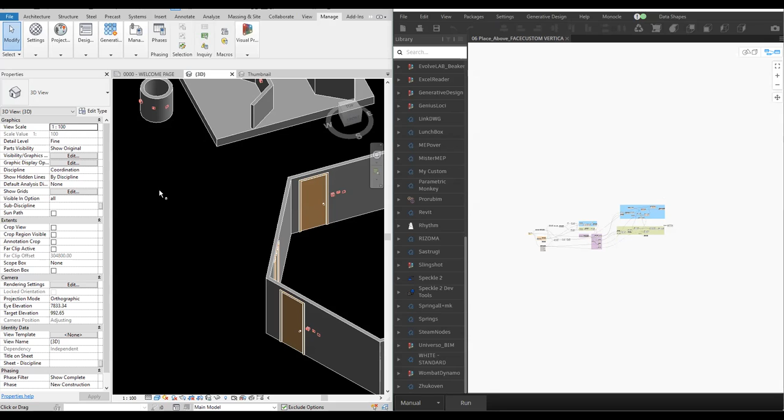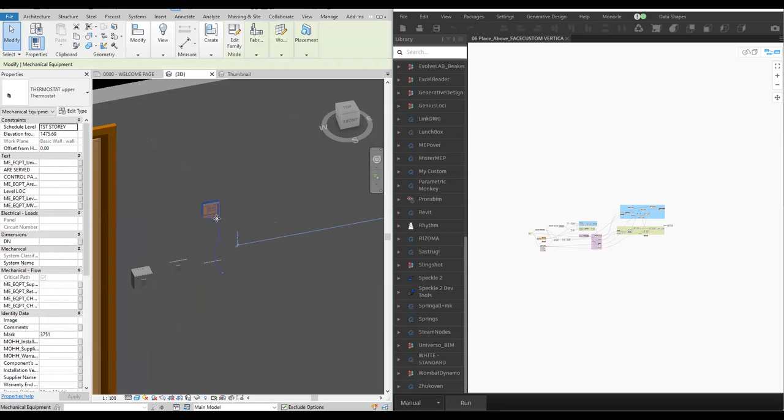Here's another automation: how to place a face-based family into the walls. So you select the electrical elements, already finished placing all their lighting switches here. For example, there are multiple switches in this sample. After placing the electrical switch, we require placing a thermostat above it.

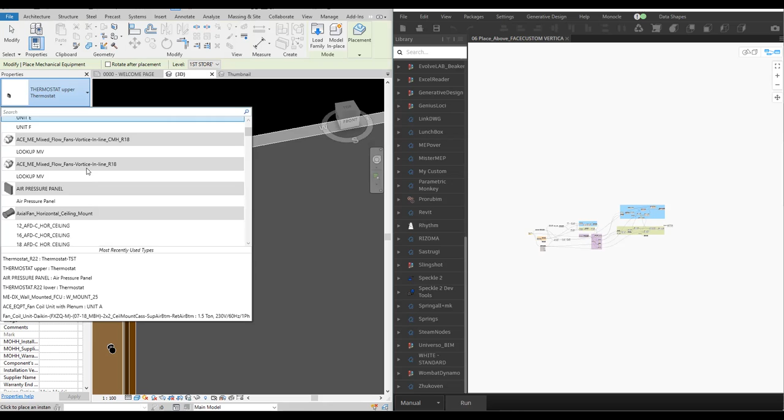So I type ME again and check the air pressure panel. This is the work that you need to place. For a specific room, you place a thermostat, then an air pressure panel above. Take note that this is a face-based family.

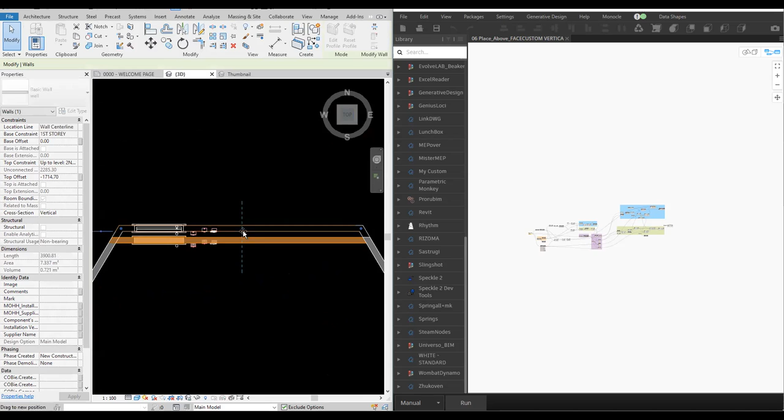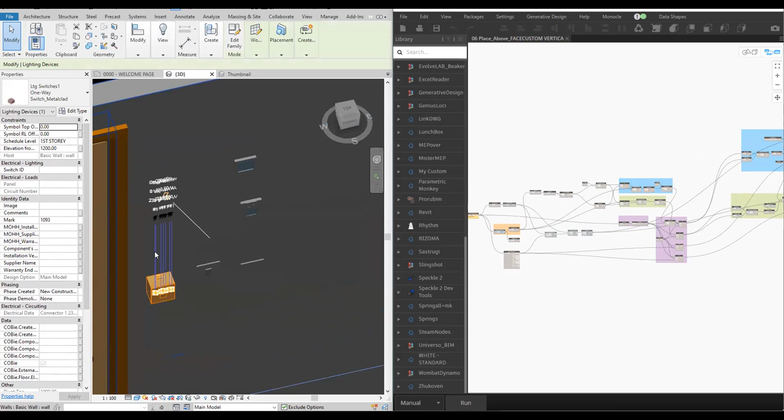If this is an architectural link and it's moved, all the family moves with it. So we'll cover how to work with Dynamo and how to edit custom families to work in your favor with the script. This is an automation: you select only the electrical switch or lighting switch, then automatically it places a thermostat, and the next step is the air pressure panel.

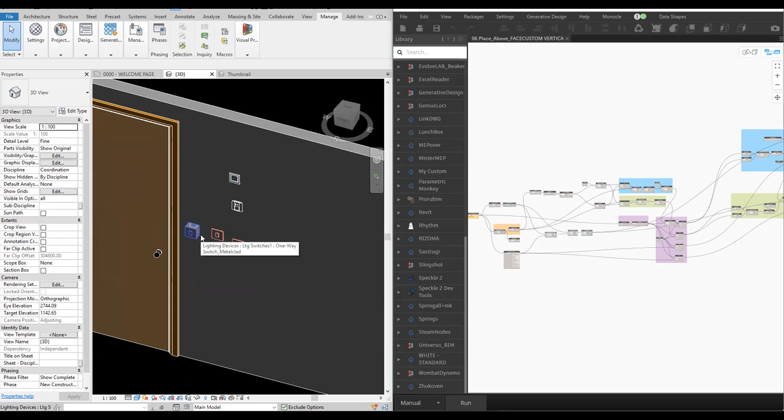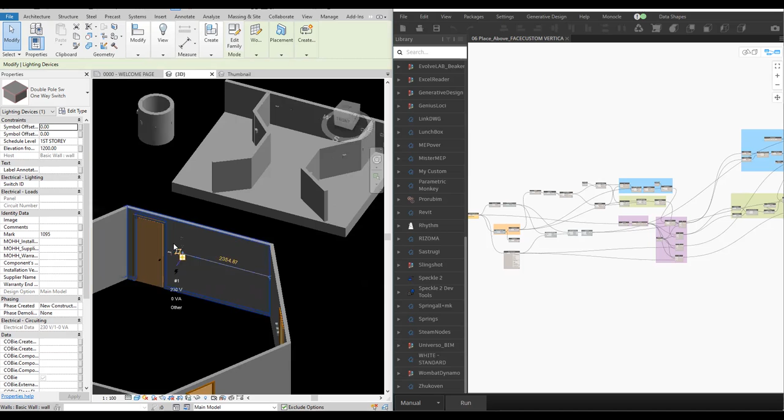So let's go. This is your project with all your walls and doors. Electrical is ready placed, informing the mechanical team they've already placed all the thermostats. If electrical is finished, it's way easier for us to place automation. We just select the lighting devices, then automatically place a thermostat and then an air pressure panel, or we can place this face-based family electrical. Let's try to place it here first before we go there.

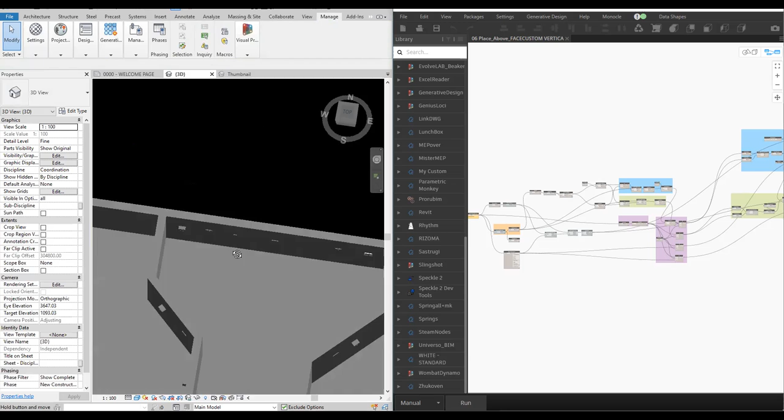This is a thermostat also, which we want to place above. Any face-based family can be placed. So let's start with this typical X and Y coordinate walls, with no sloping, no reversing of the start and end point of the wall.

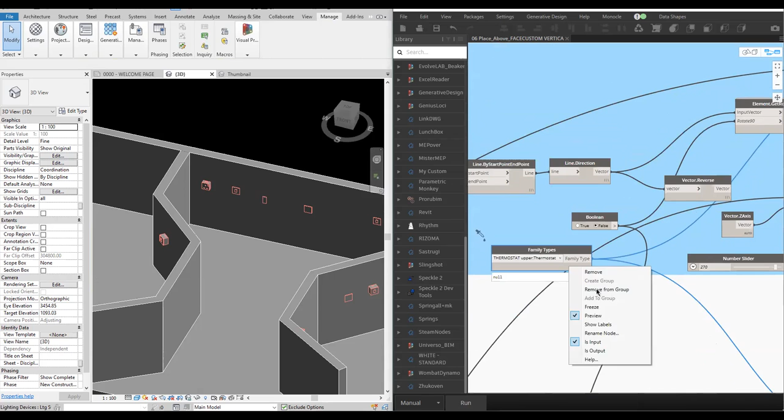Okay, start here, maybe I'll do it as automation, face-based vertical. I'll just face this one and then face this one. Then where's the family types? This one. Remove from group. Let's just try the thermostat above, I'll go one by one here.

Now we create a script. This one's smaller. So we select first the elements. There are two processes here in the script. Once you select, for example, one element, then run automatic. Once you select one element only, we have an if-statement formula here.

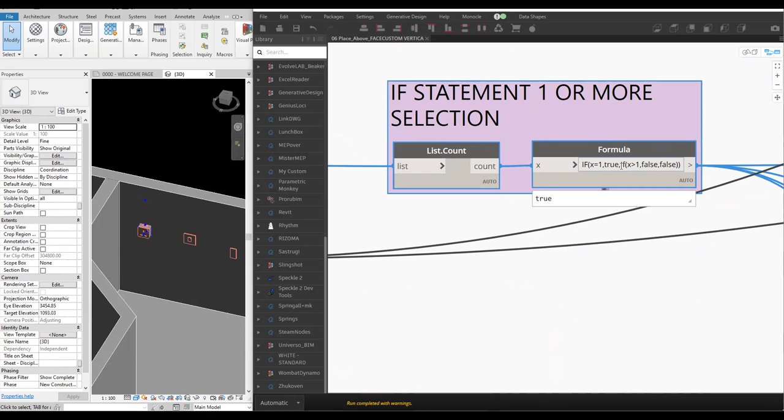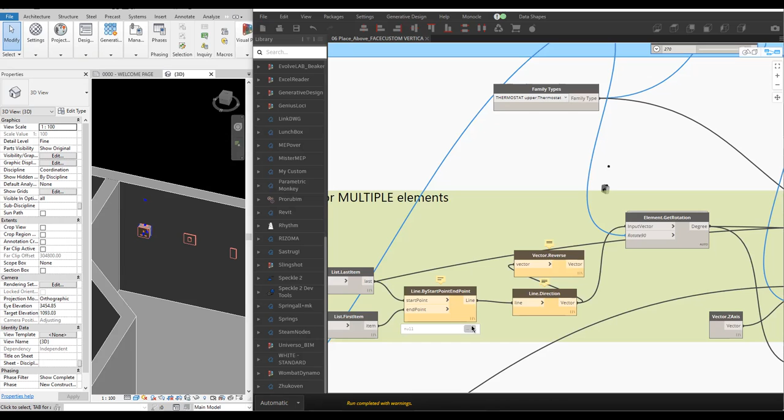If the list count selection is one, then true. If x is greater than 1, false, it will go here. So this is the selection filter for one or more than one. As you can see, this is for a single element, and this is for multiple elements. Currently this is zero, no value, none, because we set the if-statement formula here. So this is a single element only, this is the script.

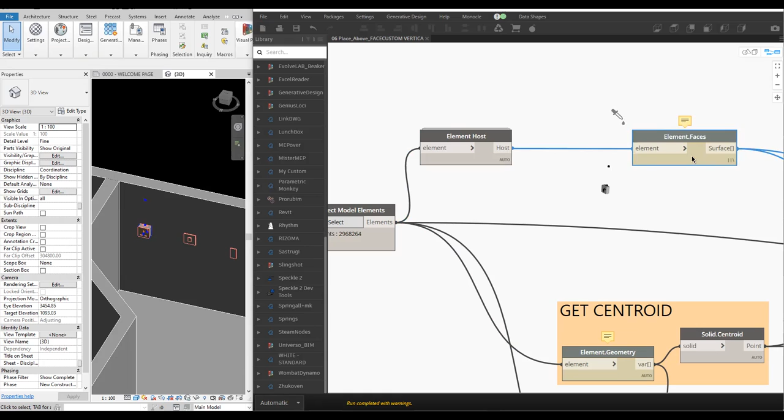So what happens here is we go back to the beginning. You select the element, then get the element host, which is the wall. You'll need this because we're going to use a face-based family instance. Then you get the element faces, the surface - let's screen capture this one. Next, we get the centroid of the geometry of this element, the element geometry centroid also.

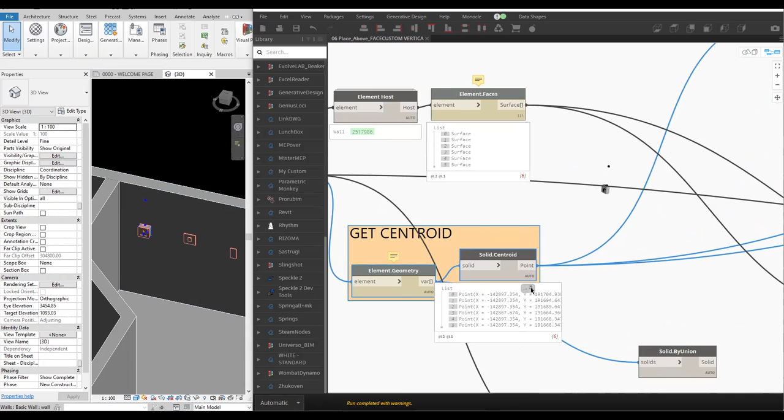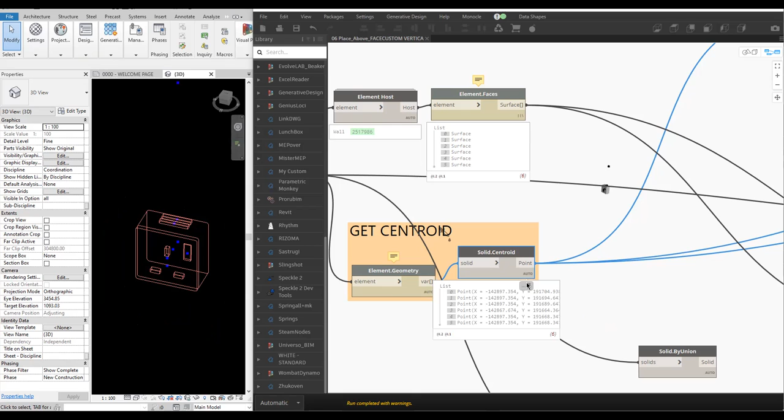Meaning that, for example, in this family, if I go to the frame, all this extrusion is a solid - solid, solid, solid, solid also, see, then this is solid. So we're getting all the extrusion in that family, all the solids, and this is all the centroid.

After that, we filter this customized family. I placed specifically these two extrusions above, so I can get the 2 points because it will control the rotation of our face-based family. I get a line there, and then I get the vector also, placing a line between those 2 points. So how do you get that? How to place a temporary or reference point?

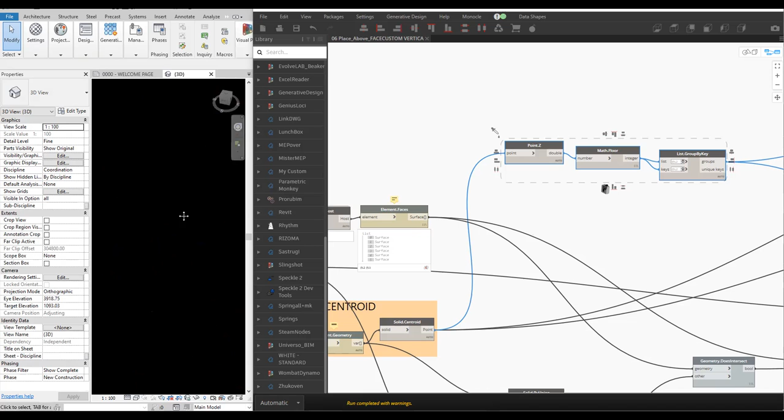Select this one. After getting the centroid, you go to the Point.Z, this one. Then after that, you have a Math.Floor, so you select all those Z values with the highest value, sorted.

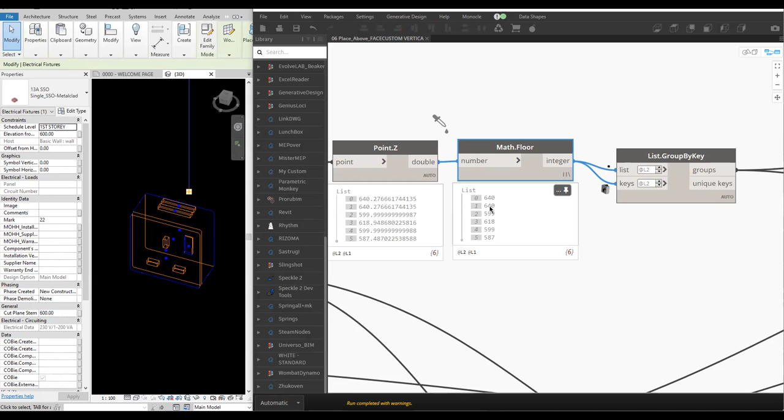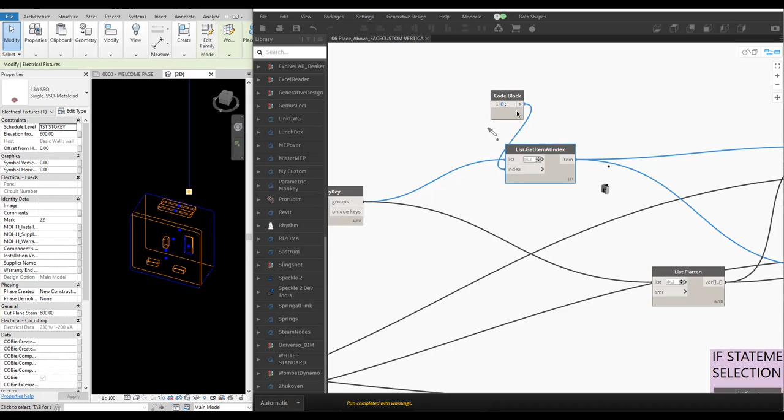Ascending order. So 640 is the highest, 587 is the lowest. So after that, you use List.GroupByKey. Okay, you have the group here. So you're extracting the groupings of the highest value. And after that, now you extract the group list in group 0, this one, 640. So this one will come up here, 640, 640. Okay.

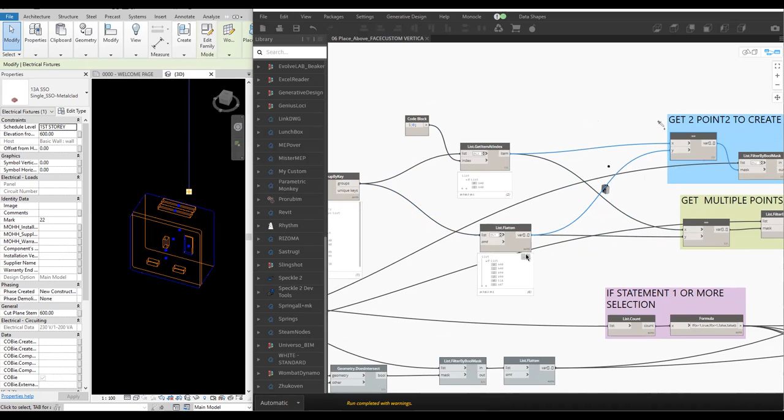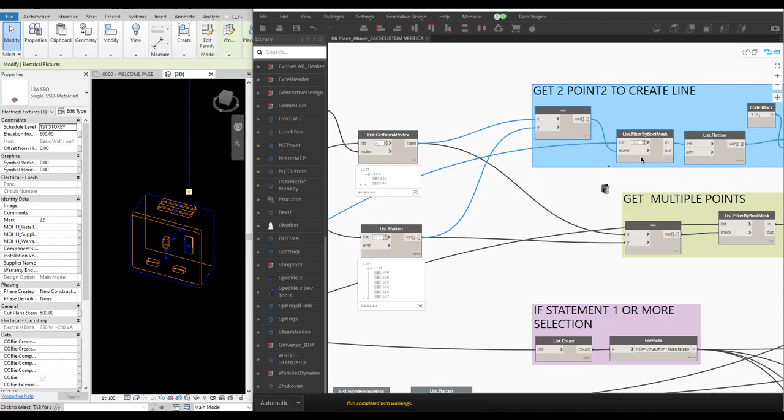Then after that, you flatten this group, and this is the numbering. You can get it here, or you can get it directly here. It doesn't matter. Then after that, you have to use Equal. So 640 is equal to this 640. You have to equal them. If it's true, then it will be filtered here. So get 2 points to create a line. So this line came from this centroid. So we're getting these 2 points here. Okay.

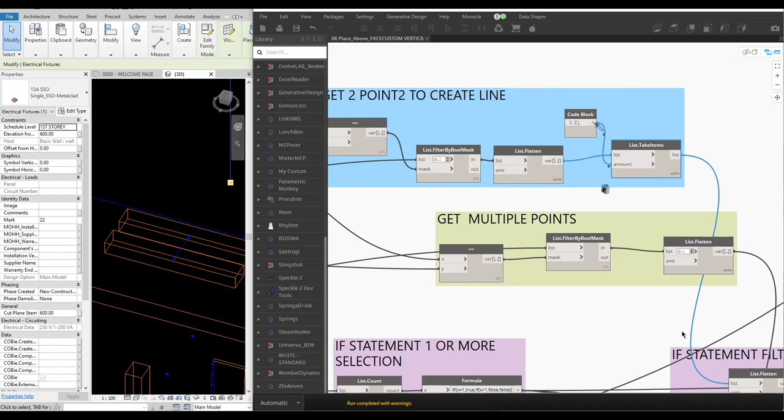After that, you get the 2 centroids, then you use List.TakeItems, 2 items. Or you can go directly from this one to here, flatten. Okay. So this is our single selection. Then it will go here. So this is the first item and the last item. So either this one or this one. Then you have to create a line.

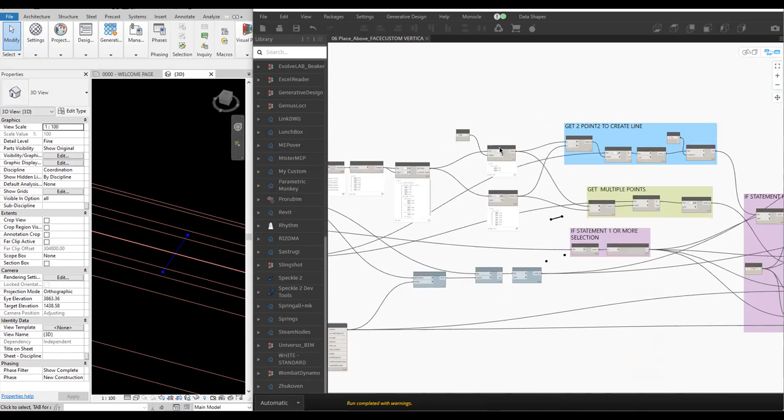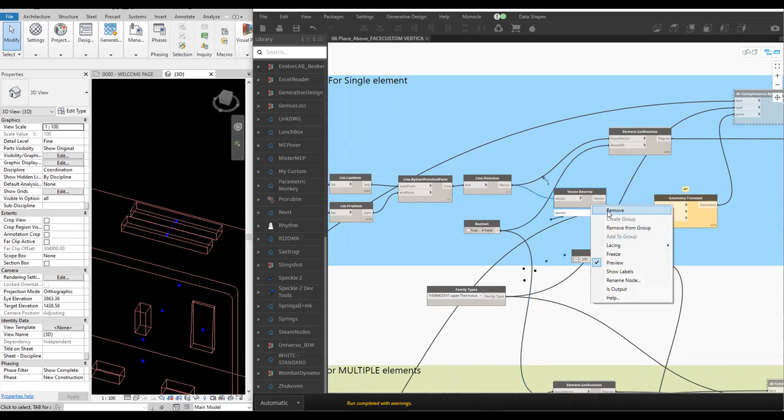When I select this one, wait, I think we should turn on the preview of this geometry. So when I select this line, it's here. This line is this line. So it will control our line direction, the rotation of our elements. Then after that, direction, you can remove this one or not. You place here Line.Direction, then Element.GetRotation. So you input the line direction here, then the rotation will be false or 0.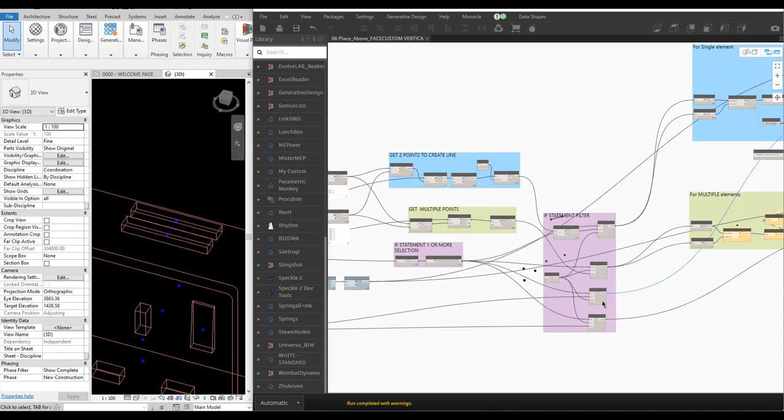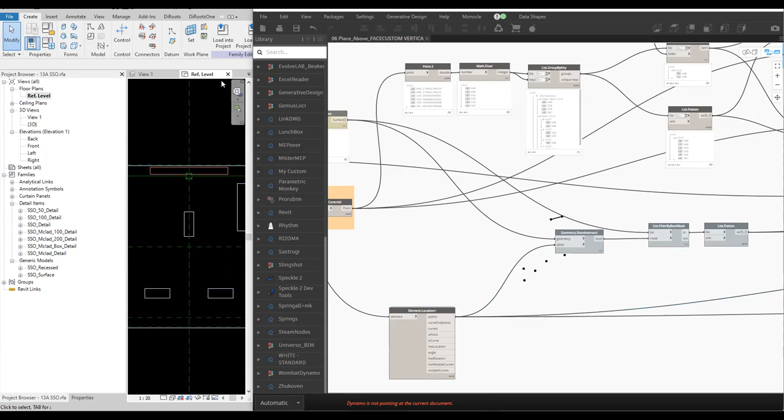After that, we get this Geometry.Translate. So where did it come from? It came from here again. But the value will come from the point, meaning you're getting the point of the reference point. I'll show you. Edit family. So if you go to the reference point, you're getting this center point here, the X and Y in the plan. That's the point you're getting. So you must properly center your family for this script to work.

Okay, going back here. So feed that one to the Geometry.Translate. So you're going to translate it up to here. Move. So this is the slider. So that's 200. It will move also. Then you feed that to FamilyInstance.ByFace and point.

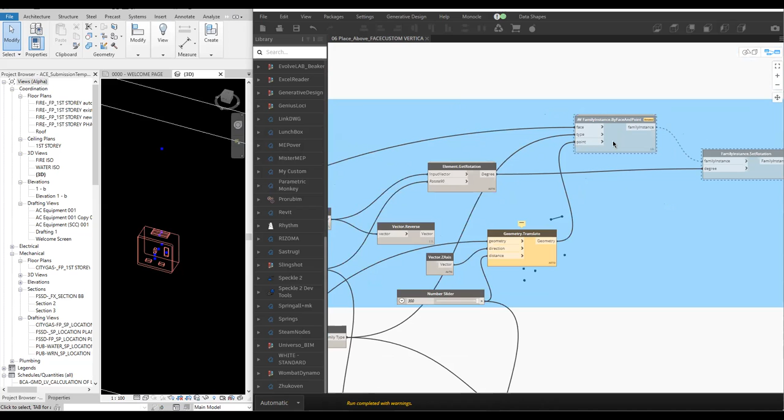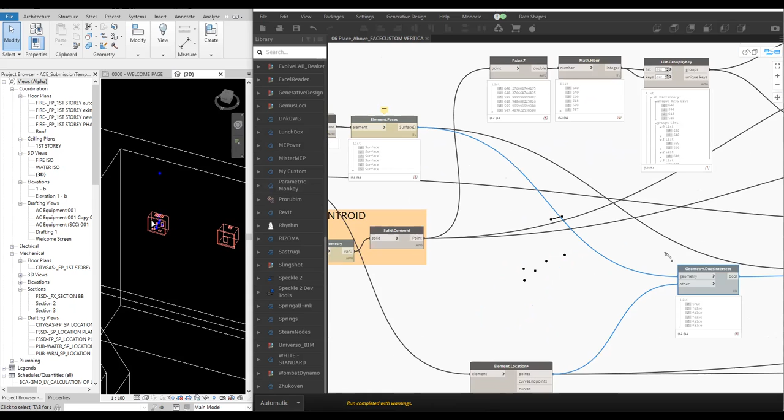So the good thing is, if the architect already finished modeling, we can get the host element. So if I select this one, face. So this is the host. This is the face. Then after that, you have to Geometry.DoesIntersect the face, the point, this center point, the X and Y, and the surface that it is hosting.

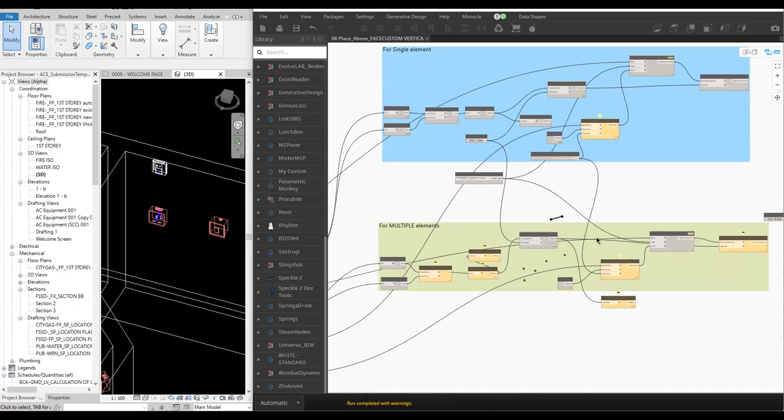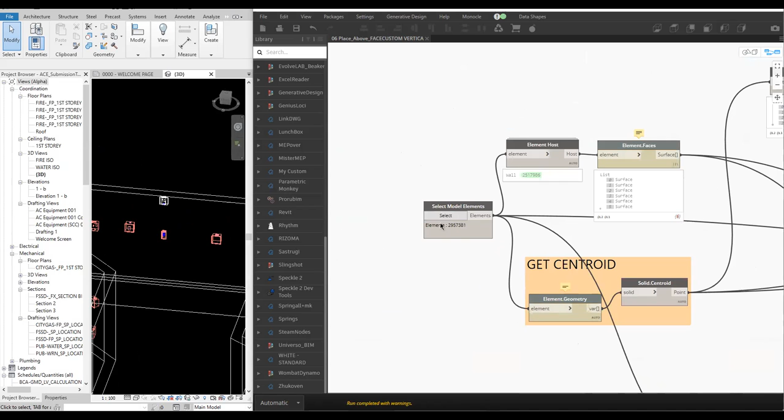Then after that, if I unfreeze this one, it will now place the thermostat, the face-based thermostat. So this is now our thermostat. Same here when I unfreeze this one. So this script below is the multiple element selection. So minimize this one. So if I select one by one, it will place one by one. For example, this one, it will transfer there. This one, it will transfer also.

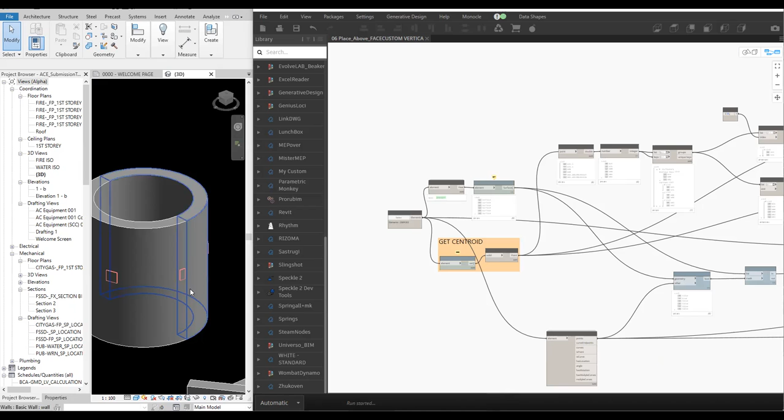So make it shaded view. It doesn't matter. If I select here, it will transfer also. So single selection is okay. Select here to place with correct orientation and offset. So if you use multiple selection, just select multiple here. For example, I will select part here. So whatever the orientation, it will place to the face. Mind you that this one is face-based.

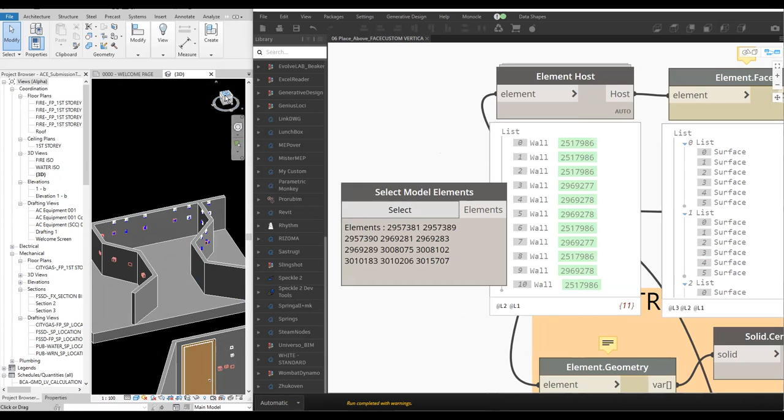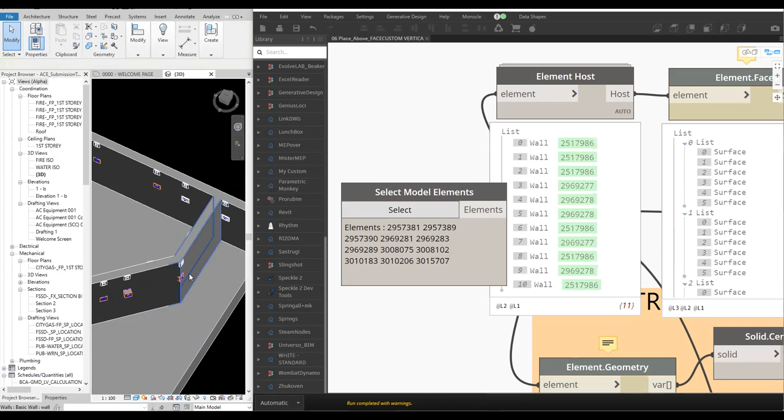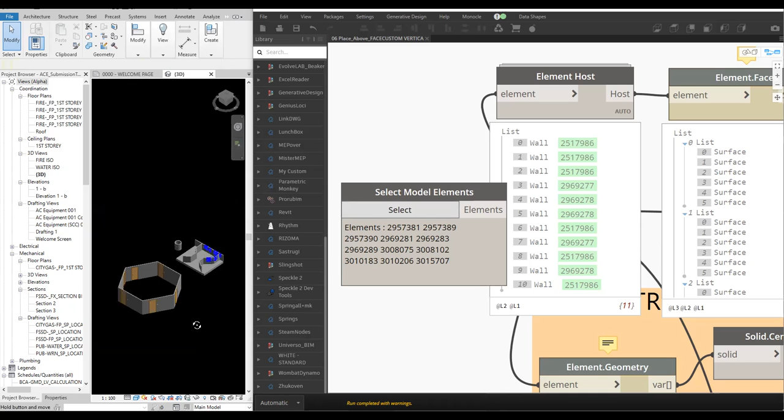So let's say the architect moves their walls, then it doesn't matter. If I move this one, it will follow. See, it's face-based. If I move this one, my thermostat will follow. So this one also, let's say I move this into here. It doesn't matter. The thermostat will follow. So imagine you also want to place here, select, we'll place it here also, the center part.

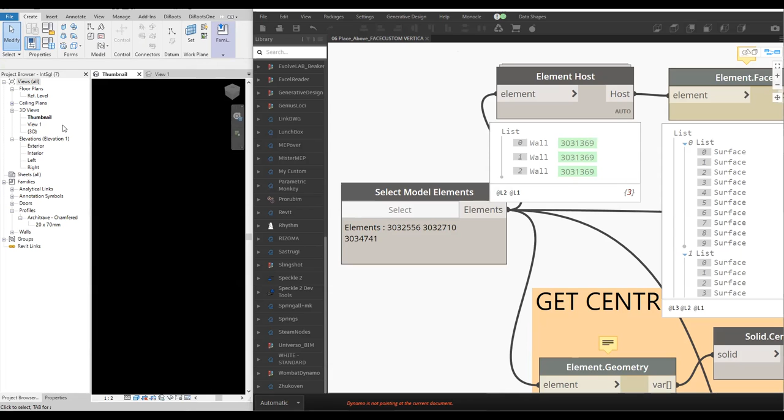What if I change the family? So there are two families from this Dynamo script. We have face custom vertical, meaning that if you edit this family, so outcome, and select.

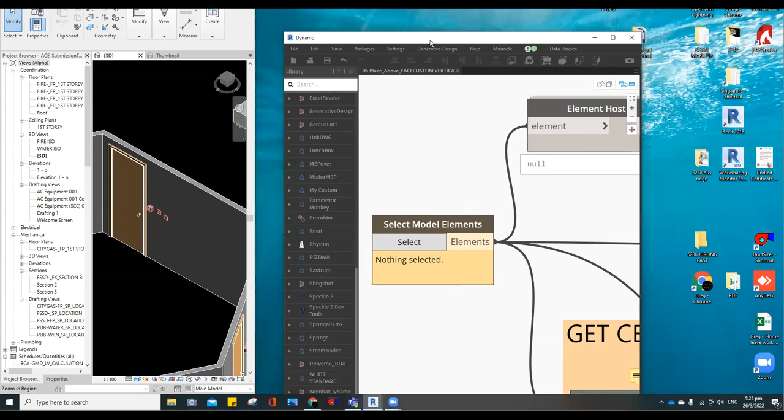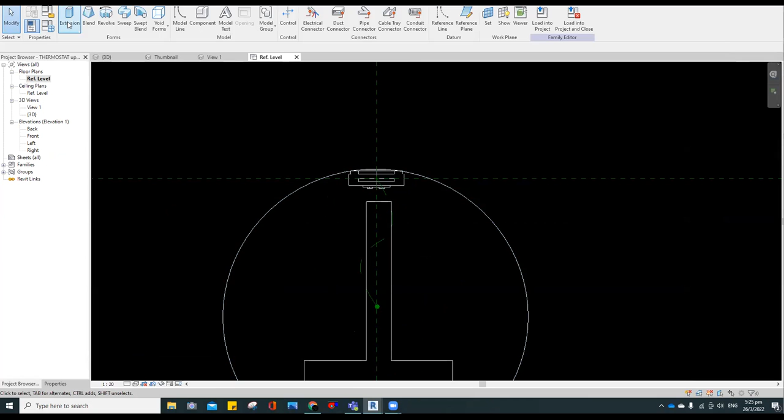Okay, so go back to the family shaded. So as you can see, this family is a hosted family. So if I go to the plan view, that's the orientation. It is vertical. The thermostat is vertical. So go to 3D view, this one. Okay, but still it is a face-based.

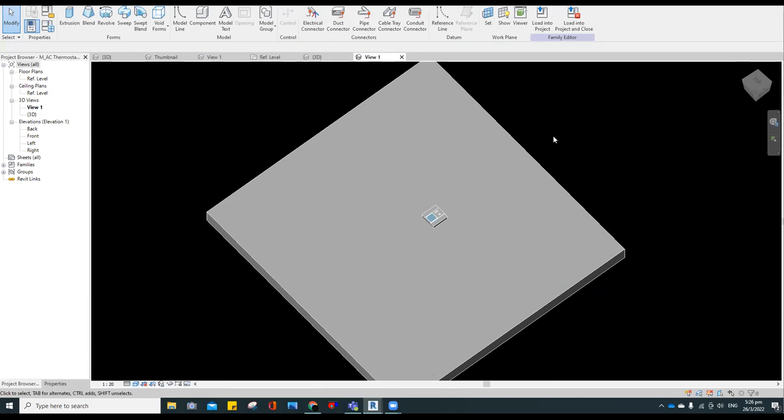So if I edit this one, this is the original one. Most of the electrical lighting fixtures are in this orientation. It's a face-based family, like this. And then I load that into the plan-based family, a generic one. So here, this one, plan-based. Okay. Now for this one, close this one, close this one.

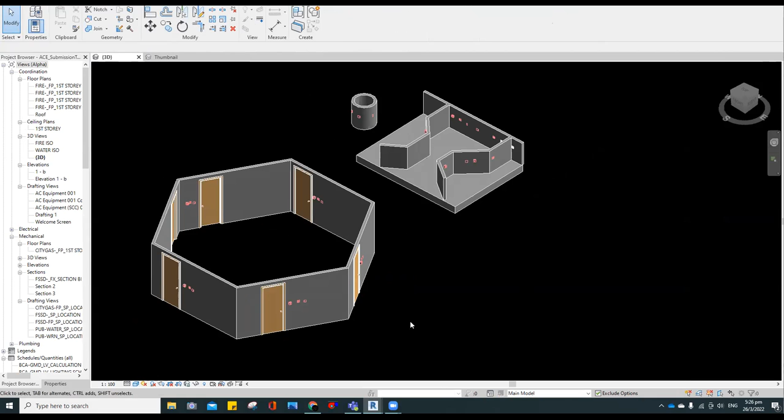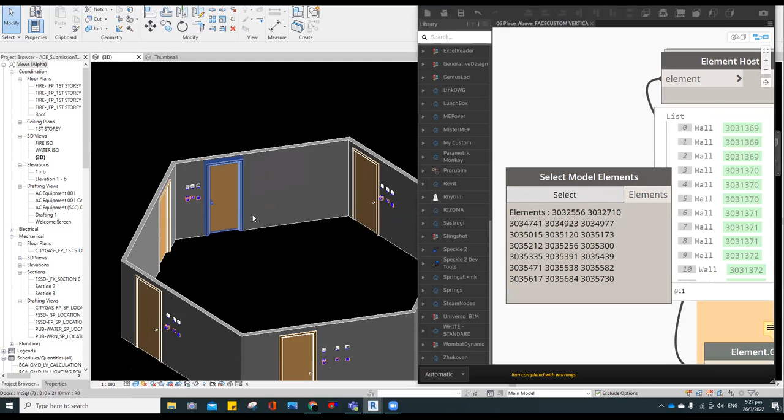So that's the advantage. You have to create an automation. Again, select this one, select all these. Let's say you select this one. It will place all the thermostats, right? Then we place, so some of it is manual. I don't know why it's like that, but it doesn't matter. Still minor changes. We can still automate it all.

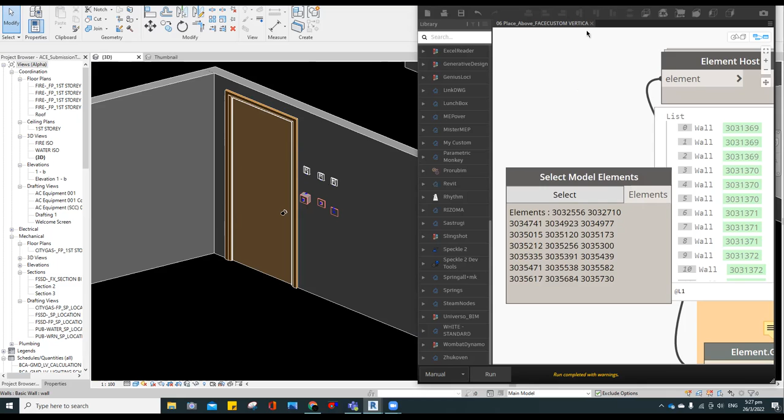Okay. Then next, we are going to place the air pressure panel above the thermostat. So we can save this one, or we can bake this one, run. Close. Okay, we open again. Then we change to the air pressure panel.

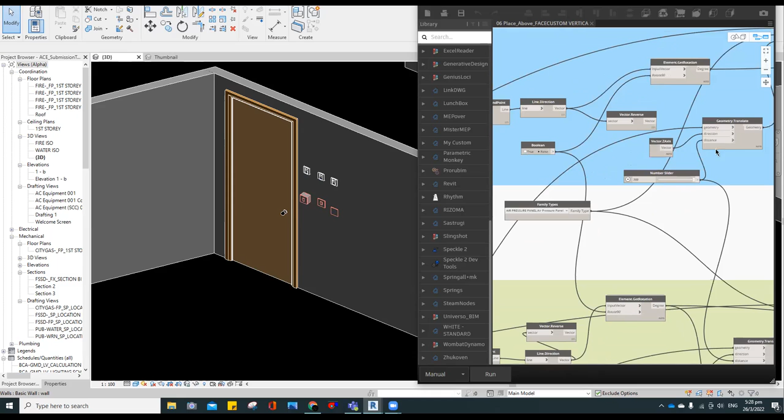Okay, you can do it also in one go, but if you want, you can just restructure the script to automate the placement of the thermostat and then the panel. So I'm just exaggerating here. So let's see. Then I'll place now the air pressure panel above. Okay. Then run.

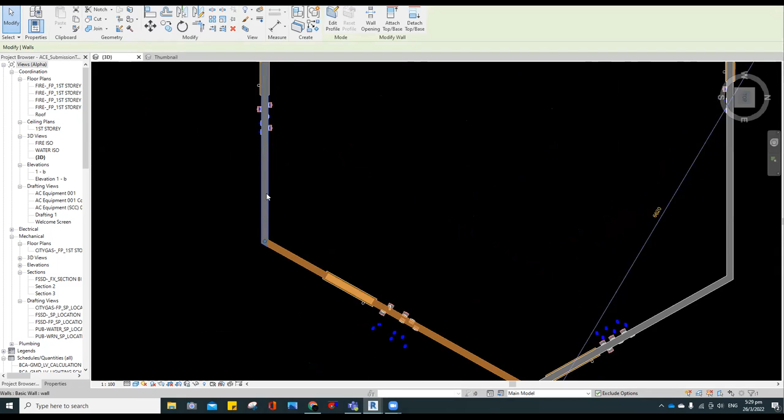So it's here also. This is the air pressure panel. It's face-based also again. If we go here at the top, I will put this one to follow. Usually architectural, they will move some walls, remove some walls. Usually move. I prefer move. Okay, you can place there. So it's there already.

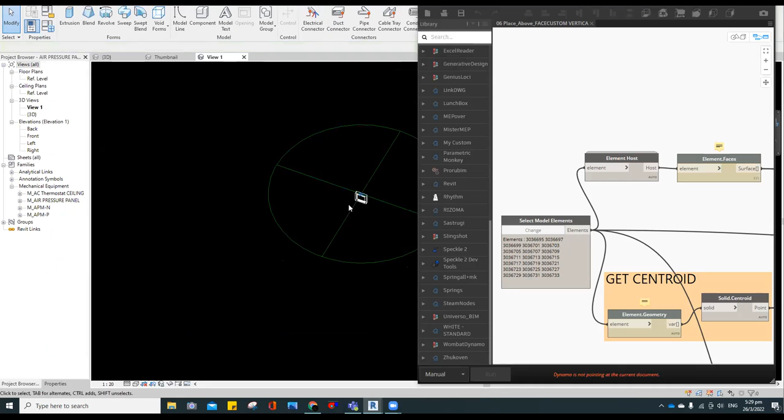So we go to another script. This one, mind you, is a vertical face-based family. So we go select again. It's standing up. This is the front. Okay, this is the family. The other family will be totally face-based. This is a customized hosted family. Okay, so I close this one. Okay, so let's delete this one.

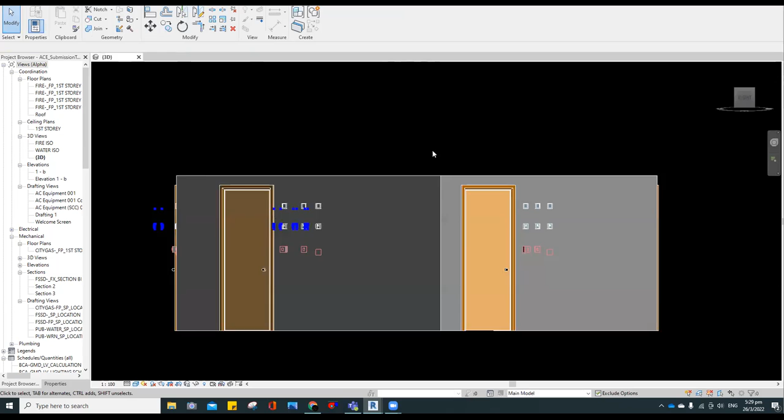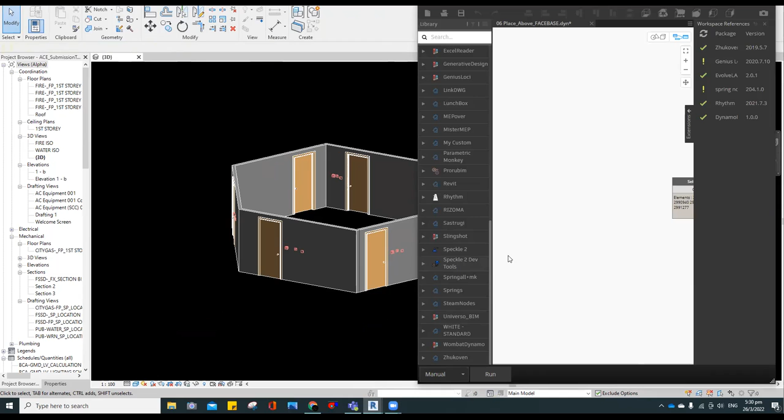Okay, now we go to another script, the face-based family, not a custom one. So close this one. No, the face-based vertical. So right now I'm using the actual electrical family, the face-based. So if you select this one, edit family, this is not hosted. It's like this. So meaning that the face-based will be facing in the top view, not in the vertical position.

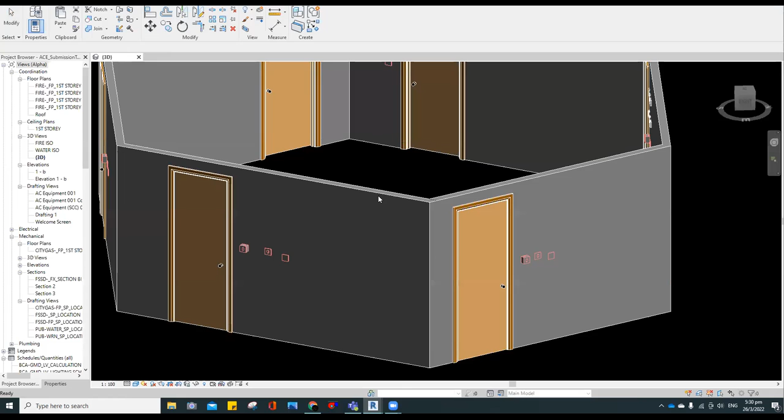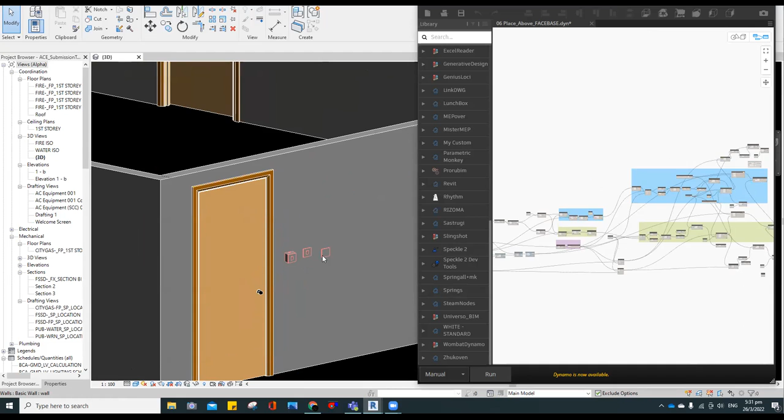There's still a workaround with that. So go back to the script. Okay, this one. Close this one. So same process, it's still automated, but it's not that perfect. Maybe around 90% accurate in the face-based because of the orientation, rotation. So let's say I want to select these switches. Select these. Lighting switch, metal card. Okay, I'm okay with it.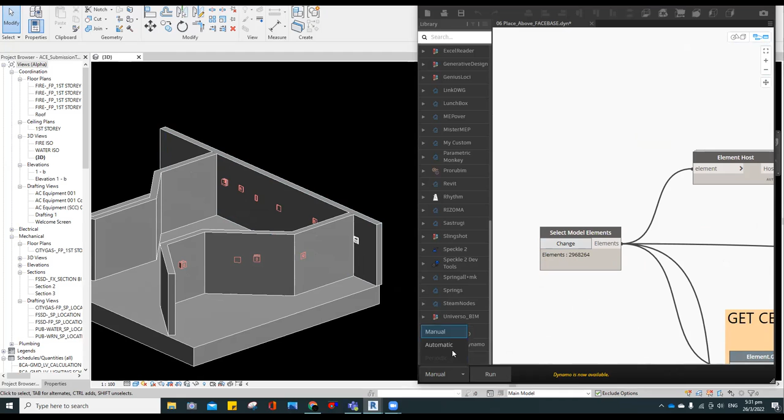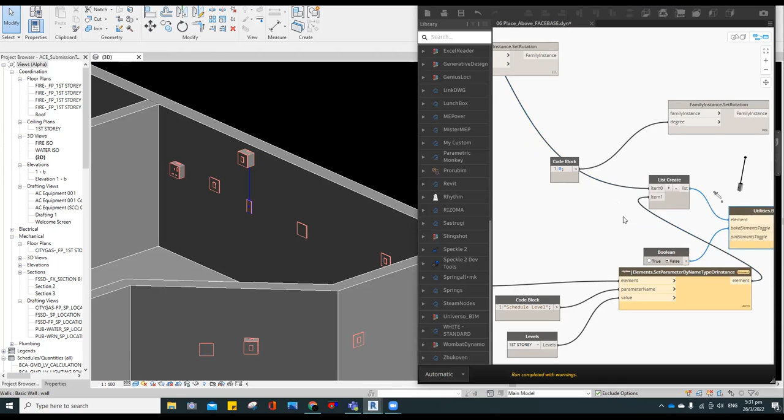So when I select one element, let's say here, automatic, to place also. See, rotation is correct. See, to place. So maybe it's better we update this one. So it should be okay. So the good thing about this one is this is a selection.

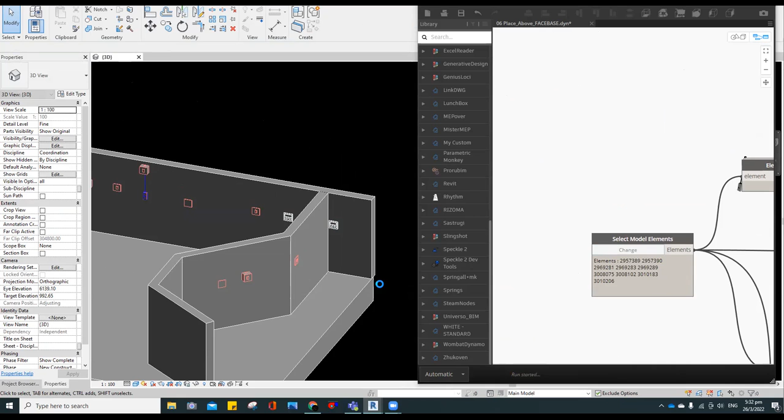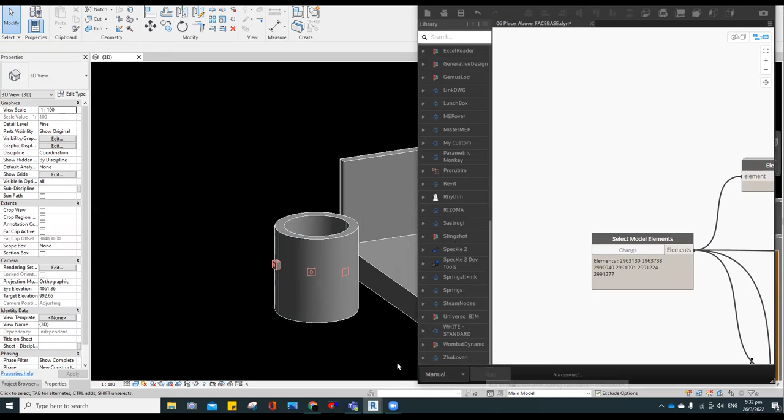Okay, so I select multiple face-based families, actual, not hosted face-based families. So it will also place it. So there are minor rotation errors, but you can just press tab space and then it will be correct. So same with here. This is a circular. So I select all these families here and then run. See, I think it's correct. Only this one is off. So I should press tab only and then we're okay.

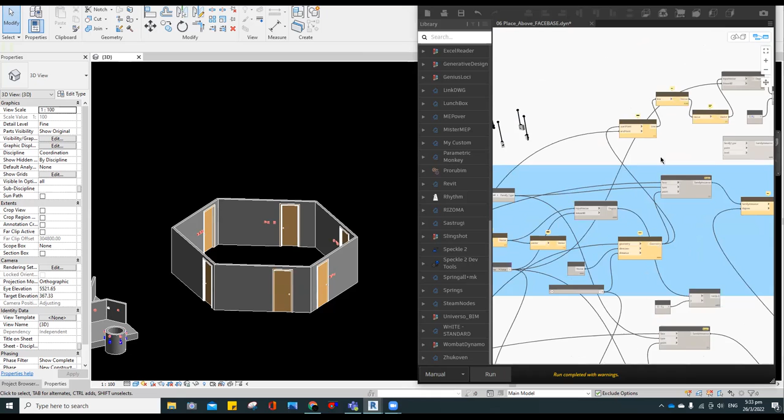So let's say I want to place also a thermostat. Can place also thermostat here. Thermostat PST. This one. So this is again the original face-based. I did not host this family. So similar to the electrical. So just go back and select all these families here with different orientations. Run.

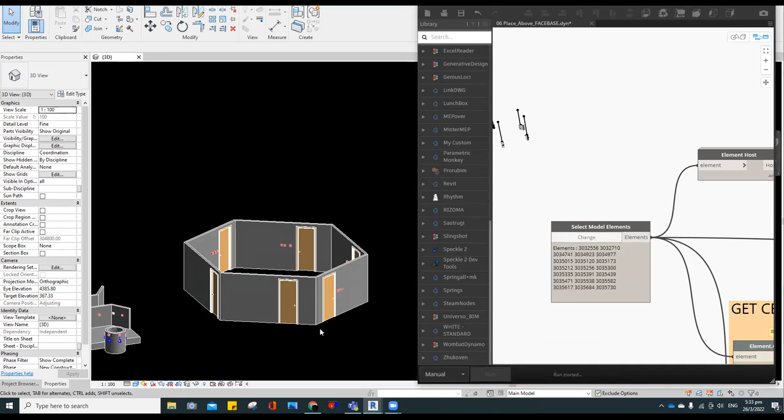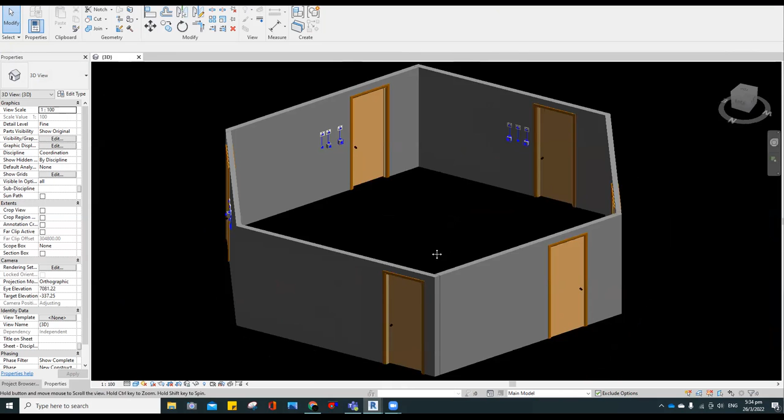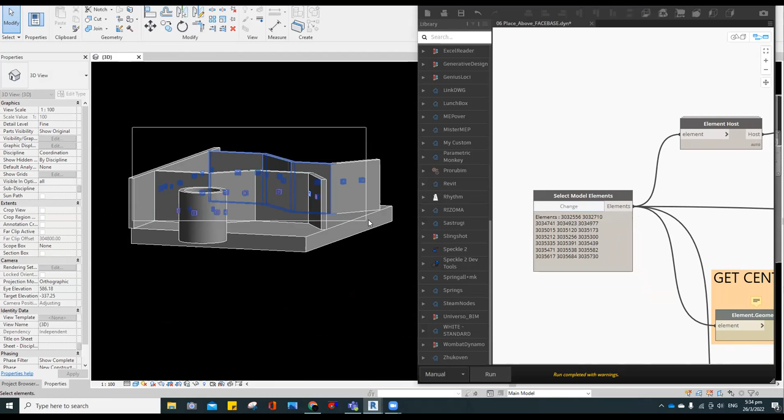Okay, it's working. I think most of the thermostats are working fine. See, correct. How about inside? Let's check. I think most of them are correct. Also in here, and I'll show you some rotation errors. But we should not stop. We just modify it, select and press space, and then it will be in the correct orientation. So let's see here. Try to run this one.

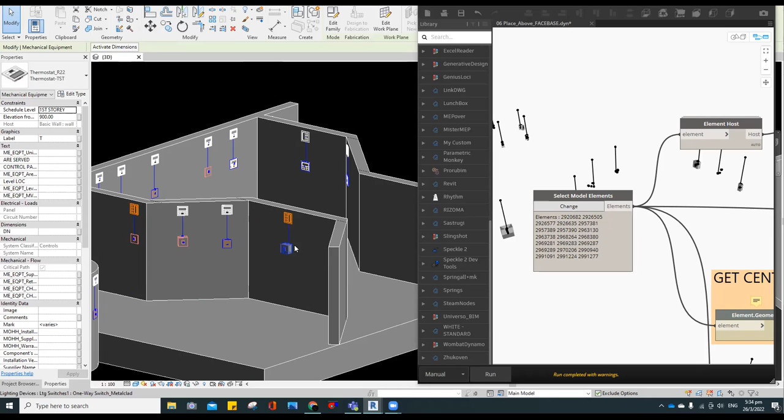So see this one. As you can see, there are some thermostats in the wrong orientation or rotation. So you just press space and then you're good to go. Again, the advantage of this one is that this is a face-based family. So wherever you move this one, it will move. So this is the soul, because they move already. That's the soul of our families.

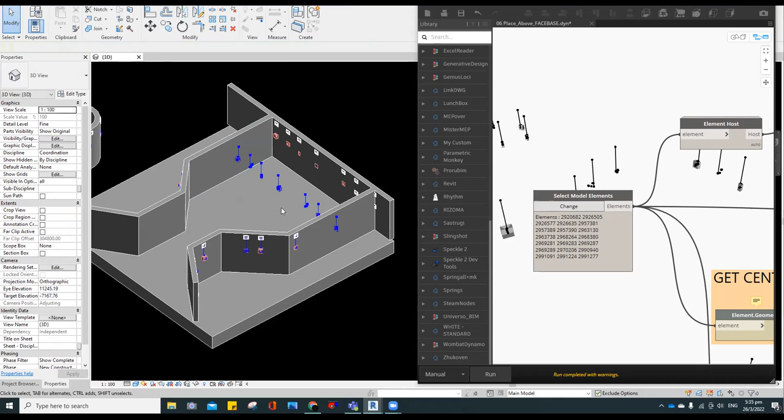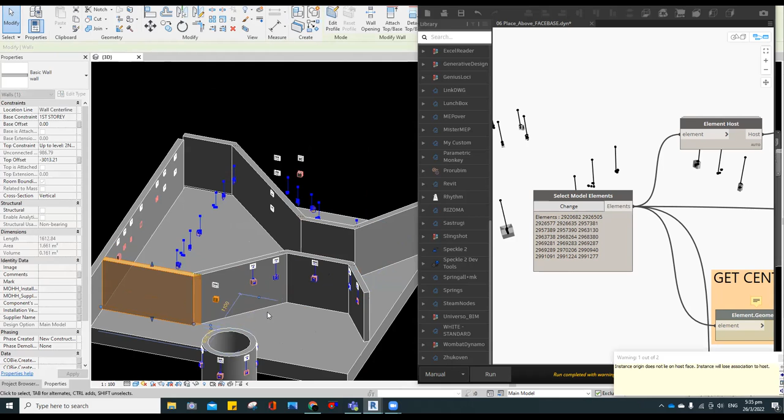So if I move it here, it's nothing. So this one moves. This one moves. This one moves. See.